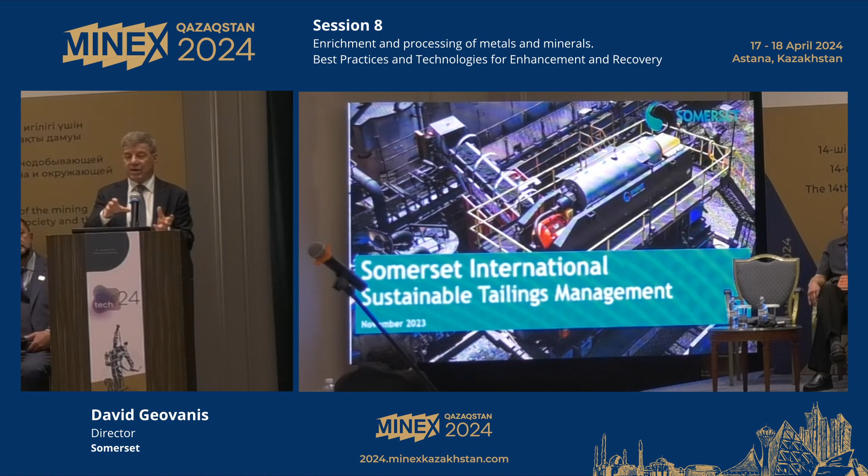So I'd like to introduce you to our company, Somerset International. It was founded in 2008, headquartered in the US, and we specialize in recovering ultrafine particles from tailing flows. And this technology is unique and patented. We've got an R&D center in Brisbane, and we are continuously innovating our technology. And not only do we have an innovative technology, we have a very innovative business model.

The way we work is we design, build, install, and operate our system in existing clients' processing plants. So basically, the client doesn't have to pay any money for the installation or the operation or the maintenance of the facility. So we like to call it asset light. And the way we get compensated is we get a share of the value of the additional tons that our system captures. So if our system operates well and we can capture an additional 10 or 15 tons per hour of product,

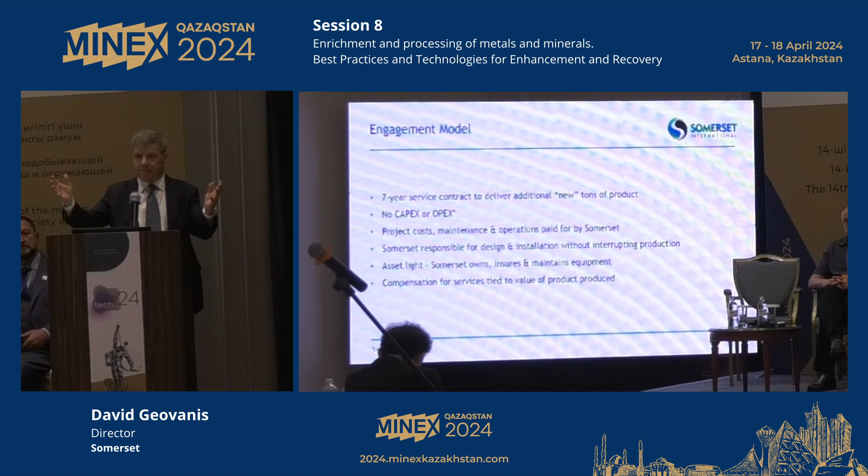And the way we engage with customers, this unique business model, is we're not selling equipment, we're a service provider, and we enter into, let's say, a 7-year contract with a client, whereby, again, we design, build, install, and operate the system, so there's no capital expenditure and no operating expenditures by the client. And we also don't interrupt the existing plant. So the plant's working, and we build our system or install it inside the plant, and we connect to the flow of the waste without interrupting the factory works.

So why we think this is attractive for clients is we increase revenues. You know, we typically produce 10 to 20 tons an hour of additional product, or let's call it 100 to 150,000 tons of additional product a year, which we deliver back onto the main product conveyor of our client, and they sell it, and then we get a share of those revenues. And there's no capital or operating risk for the client. Again, if the thing doesn't work, we don't get paid.

And it's a turnkey solution. We do all of the design, all of the government permitting, which in Kazakhstan, I'm sure, is a similar system to Russia, and permitting is not easy, but we've got a team of 30 people in Russia that have designed and built and operate our systems, and we think we can easily transfer that knowledge to here.

And we also recover water back into the plant, which is very important. I've read that Kazakhstan has some issues with water, not as bad as other markets we're looking at, like Morocco and Jordan, which, in the deals we're looking at there, they don't even care about the additional product. They just want us to preserve their water.

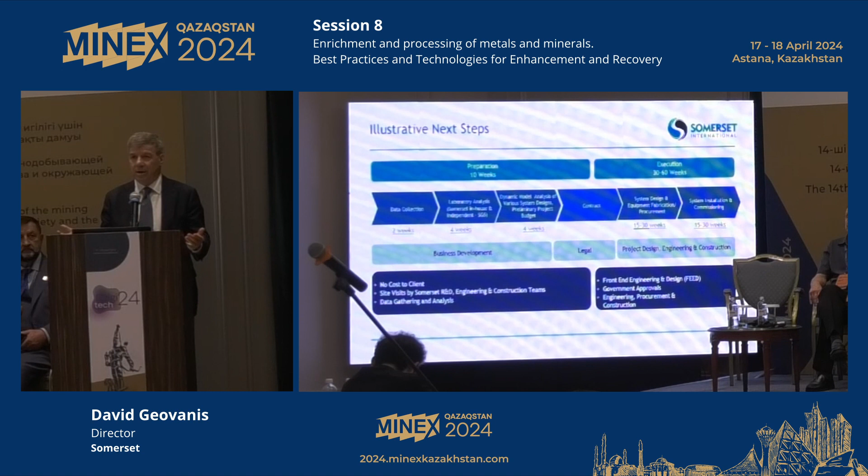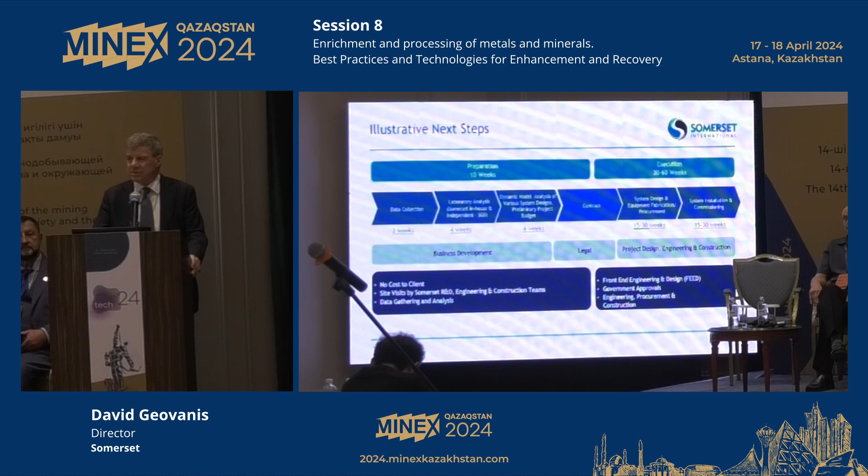And the agreement we make with our clients is, we say we've got to produce a minimum of X tons an hour at this moisture and this ash level, and if we don't, you can kick us out, and we're screwed. So we want to make sure this thing's going to work before we invest in this. And to date, we've invested about $100 million of our own capital.

And here are a few examples of projects. One project we're looking at is recovering phosphates. To date, we're focused primarily on coal, but we want to move into other minerals. And I know there's a big phosphate company here in Kazakhstan, and we're actually looking at phosphates in Russia. Interestingly, phosphates aren't sanctioned because the world needs phosphates, because the world needs food, so there's a potential phosphate company there. But this one we're looking at, we have the potential of capturing an additional 1 million tons a year. This would be a massive project with 40 centrifuges.

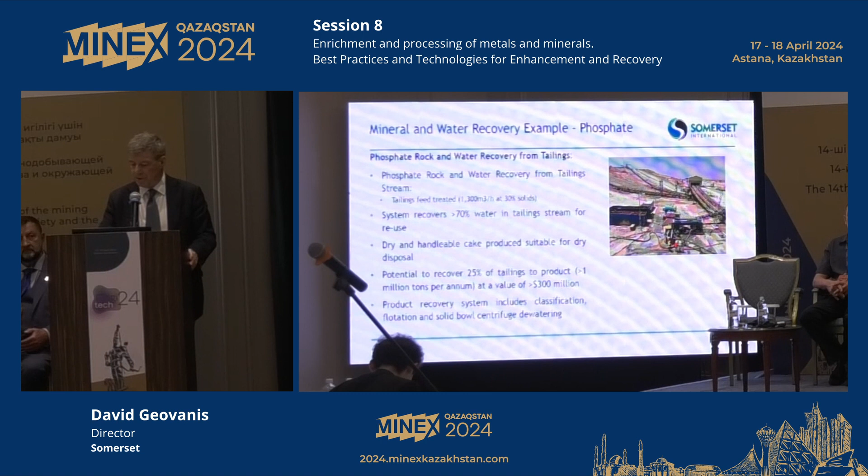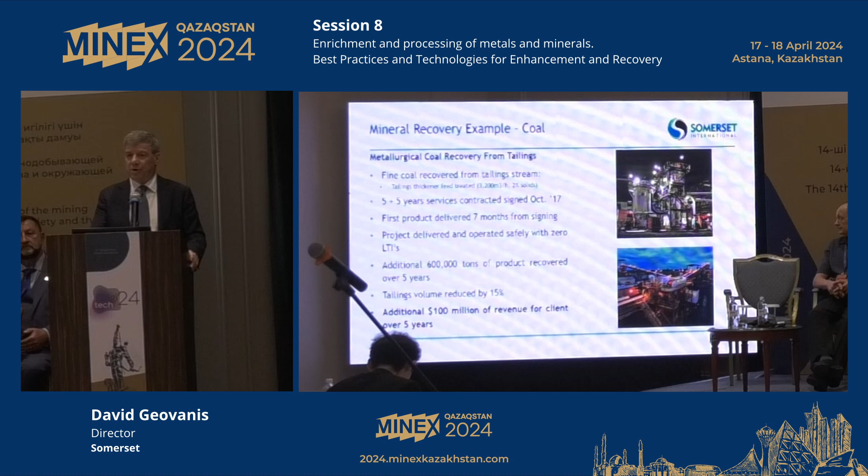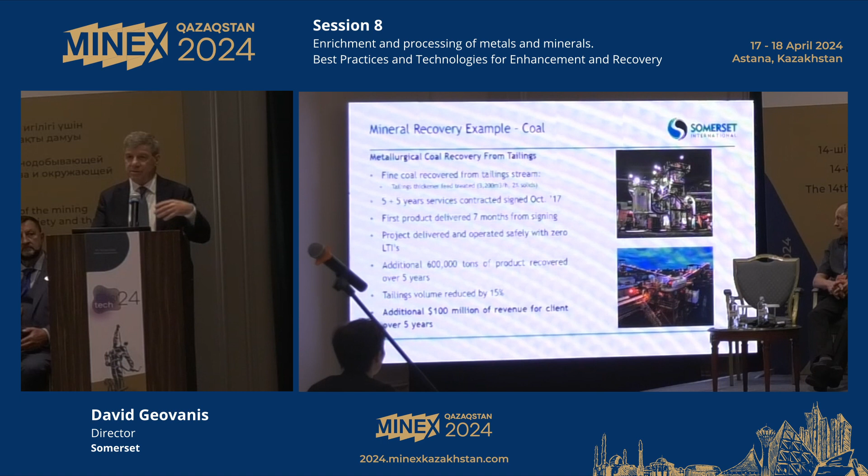This is the Australian one I showed you previously. Over the past 5 years, we've captured an additional $100 million of revenue for the client. And this is a deal where it was a 5-year deal that expired in 2022, and they said, hey, let's keep it going for another 5 years. Because for them, it's free money. They don't have to pay anything. And there's a lot of maintenance costs involved. We've got employee costs, replacement parts, and the client doesn't have to pay anything. So they're happy for us to stay around for another 5 years.

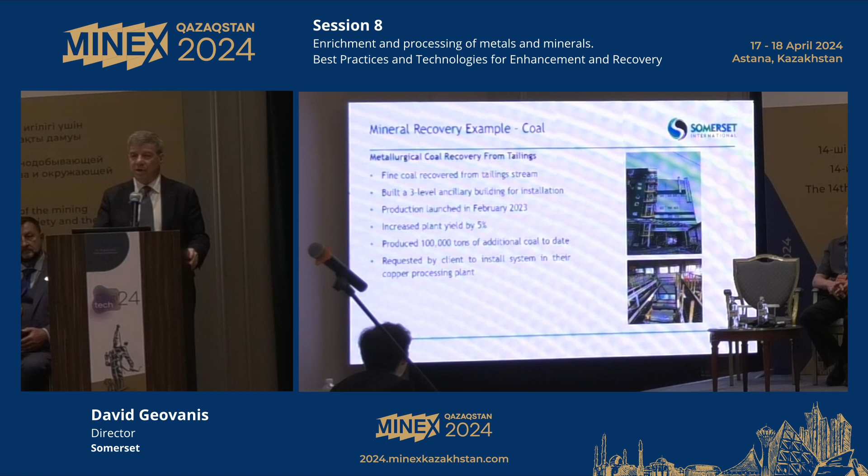This is one we built in Russia. The green building is the existing plant, but they didn't have room. So we built the white building next door to it, which is a 3-level building. Over the past year, we've produced 100,000 tons of additional product for them.

So time is running out. We'll end on ESG. Again, we capture about 95% of the valuable minerals in the stream. So that's, again, reducing those minerals that are dumped. And instead of dumping wet tailings into a pond, you can do dry disposal since we've dewatered the resulting cake. And it improves water usage. So we think all in all it's a great proposition for clients. Increase revenues, no capital costs, no operating costs, and get some points for your ESG report card.

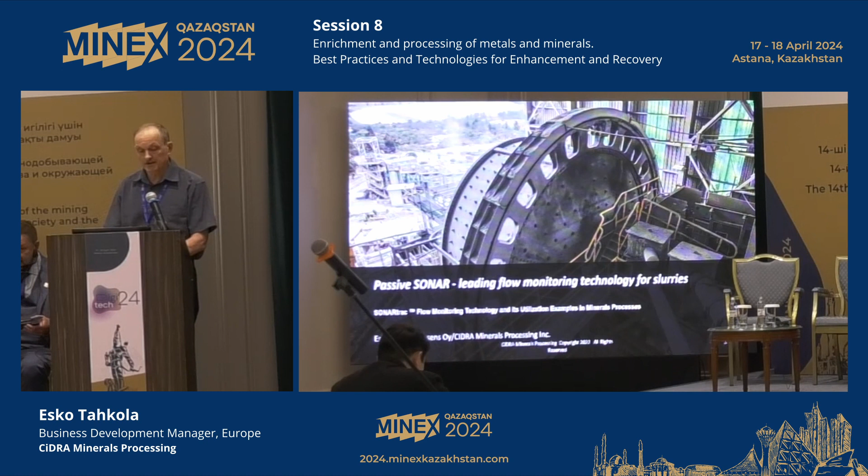My topic here is the passive sonar flow monitoring technology that has become an industry standard for slurries. CiDRA is an American company providing solutions to optimize the performances on concentrators. Passive clamp-on SONARtrac measurement is the only new flow measurement technology developed during the last 40 years. It's been on the market 20 years. It installs around the pipe. Even for big pipes, it's very lightweight, easy to install, not affected by the slurry properties.

It has a multiple measurement capability, measures the volumetric flow, also the volume occupied by bubbles, and based on those, we can correct the errors the bubbles are causing for density measurements, so you get better mass balances. And there are diagnostic measurements on the flow itself and the process running stability.

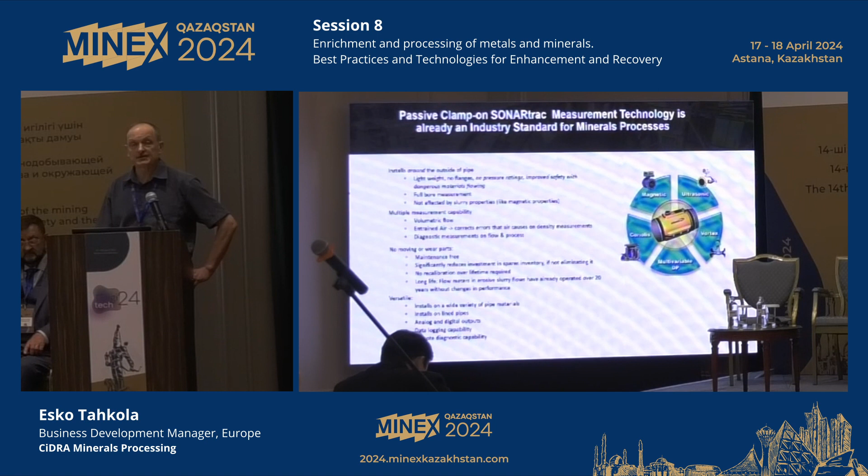There are no moving or wear parts, it's totally maintenance-free. It has a long lifetime. We have customers that have had it on pipes for 20 years without any maintenance. So you can avoid all kind of process shutdowns because of critical measurement failures. It's versatile, it installs on a wide variety of pipe materials, and it also is an effective data logger, so it enables remote diagnostic capabilities.

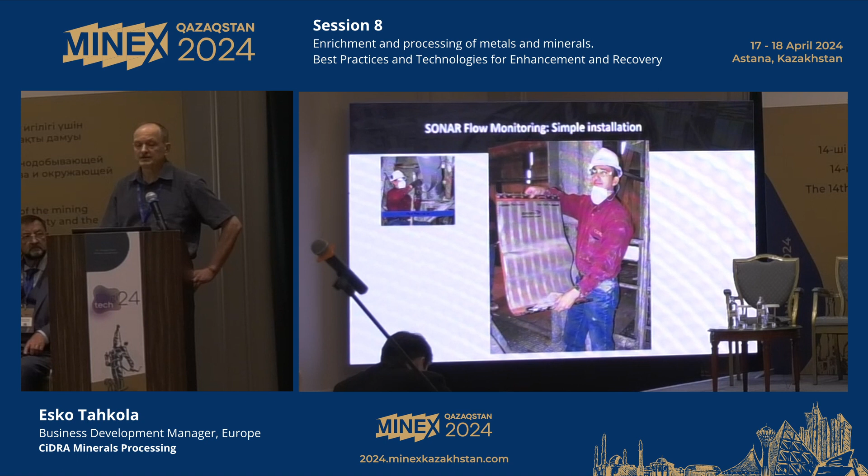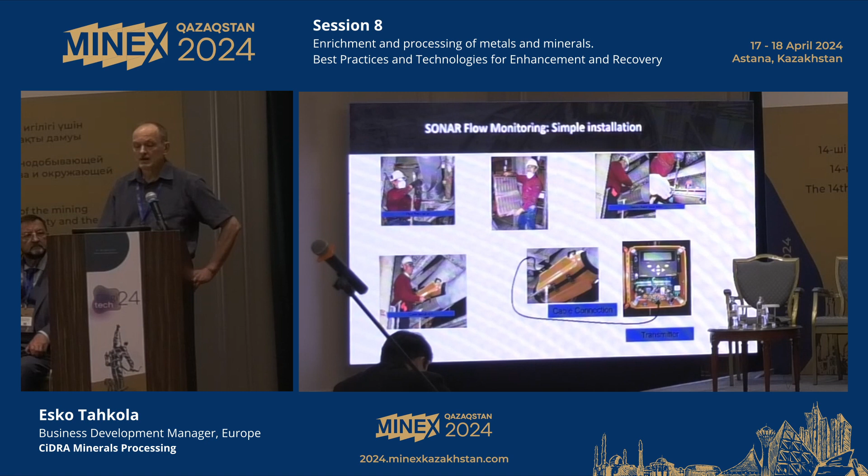Installation is simple, you just clean the pipe, take the sensor mat, tighten it around the pipe, put a protective cover onto that, and connect it to the transmitter that is then further connected to your DCS system. And like I said, it's an efficient data logger. You can pick up 1 month data histories with 2-second intervals with a USB stick and send it to us for analysis. We can do the actual optimizations according to the actual flow model in the pipe totally remotely.

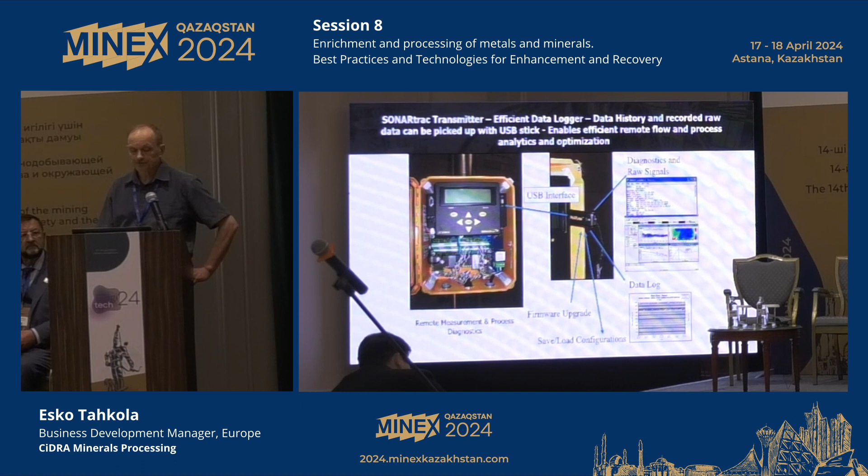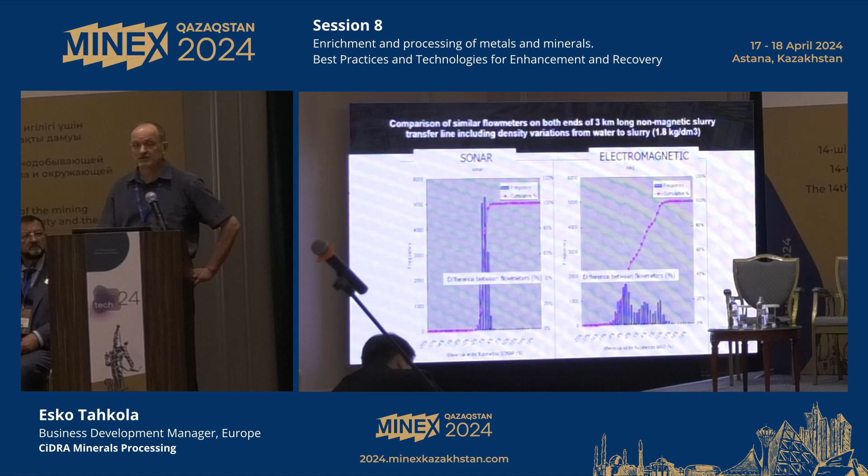Additional process measurement information is provided by the gas volume fraction measurement, so the volume of the bubbles, and based on that we correct the errors for density measurements. Then we have a flow quality signal, real-time information on the stability of the flow at the measurement position. So it's revealing all disturbances in the process caused by segregation or air content or pumping problems. And the sound pressure level is measured also, and the sound is coming from the pump, so it enables pump analysis and reveals pump service needs.

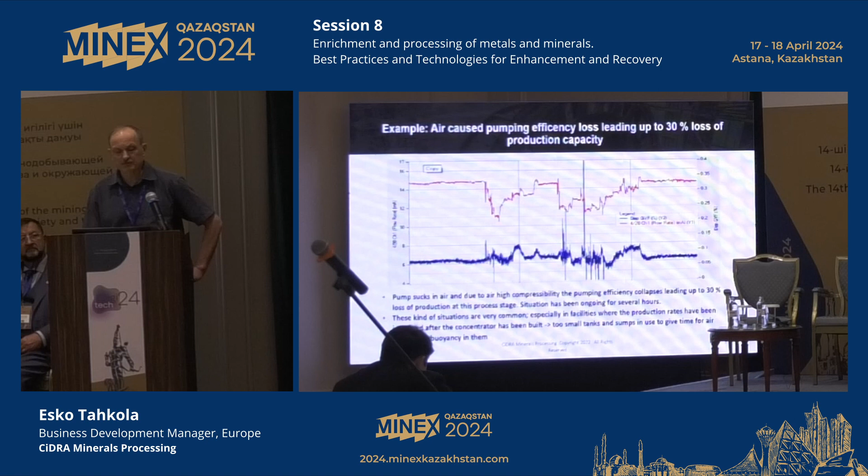Then the density measurement correction. If we take a theoretical slurry without bubbles, though there always are bubbles in slurries, and the specific gravity, so the density, of that is 1.4, the density measurement is showing that. And then we add 10% of bubbles in the volume, then the density measurement is showing only 1.26. So there is already 28% error in your mass balance.

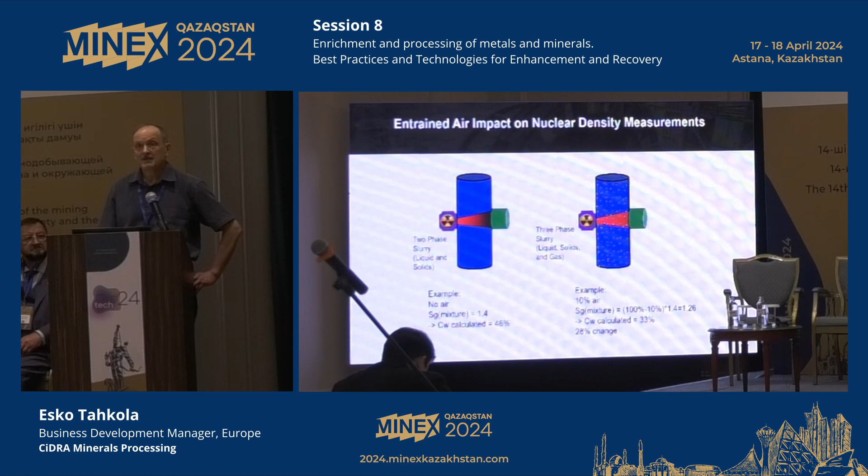As density measurement is measuring the difference between water and slurry, the closer to water the slurry density is, the bigger the error caused by already 1% of air in the slurry. So if this density is 1.2, 1% is already causing 5% error in your mass balances.

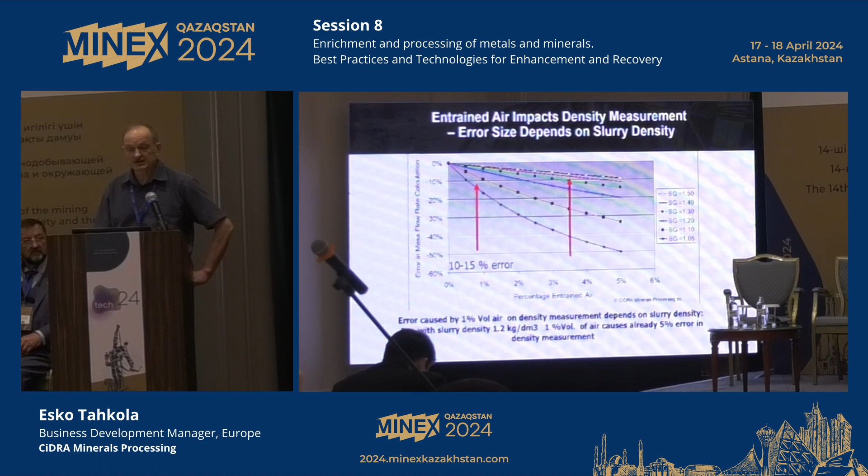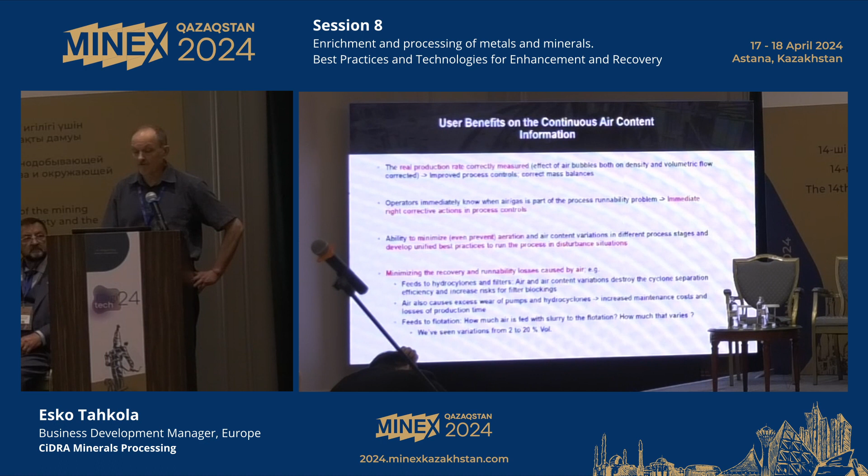Of course, with this you can get the real production rate correctly measured, and you can also always see when air is causing problems for the process runnability. And the operators can immediately do the right corrective actions. When you measure it, you are able to control it, so minimize the aeration, avoid it and even prevent it. And then you are minimizing the recovery and runnability losses caused by air, because air is actually quite a big factor causing variability in process runnability at concentrators.

Diagnostic information on the flow. We are measuring the propagation velocities of all sizes of turbulences that carry the solids forward in the line. This gives information on the real flow model at the installation position. So we can optimize this measurement to work much better than any other flow measurement that is calibrated to measure fully developed turbulent flow of water. And that model is never actually present with slurries, because there is always the gravity effect affecting the solids distribution in the pipe.

The flow model is monitored by the flow quality factor, a real-time signal giving users information on flow disturbances in the line. And you can even set alarm levels on that signal so that the operators know there is something wrong in the process runnability.

Here we see a picture where the convective ridge of turbulence is separated for the carrier liquid flow, and then there are solids flowing with a lower flow velocity. This kind of segregation leads to density pulsation that causes filter blockages, improper cyclone operation, and also line blockages. Typically in concentrators in the Western world, it's said that 1 to 2% of the process production time is lost because of line blockages.

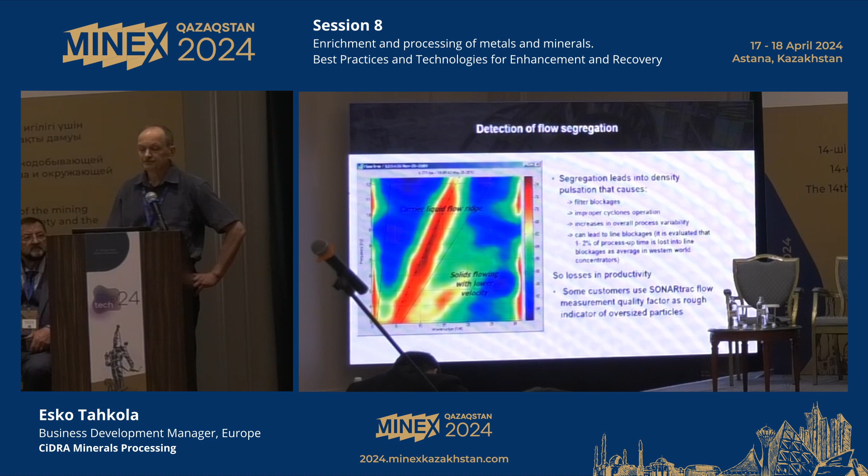Here we see a cyclone battery feed line, and the flow quality is dropping, showing that segregation is starting and a dense plug is forming in the vertical feed pipe. After a while, that plug is so dense that even the flow velocity drops. Then the pump pushes that plug into the hydrocyclone, but we can see from the flow quality that new plug formation has started. So there is continuous density and flow pulsation in that feed line, which is ruining the operation of the hydrocyclones.

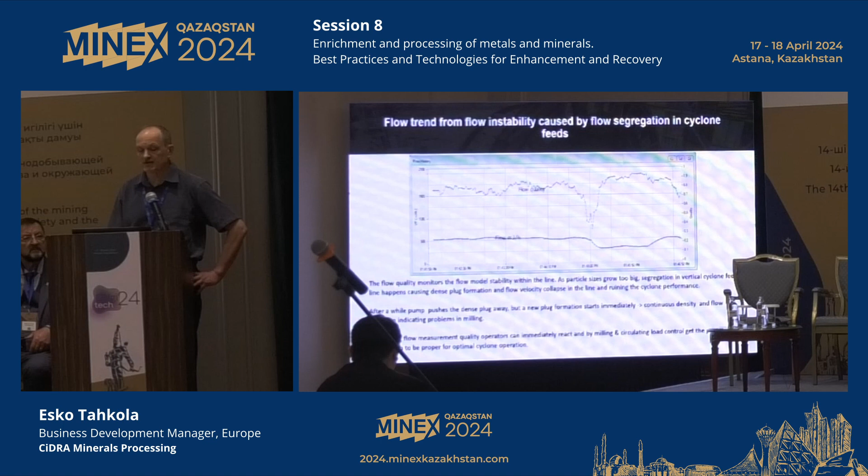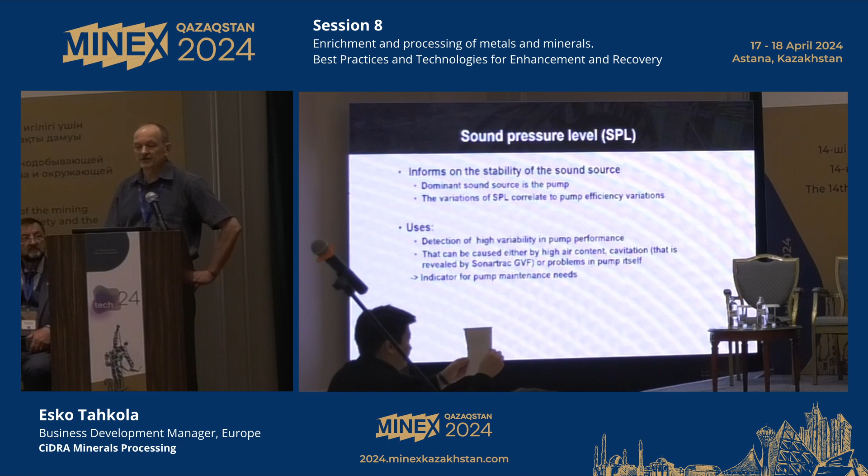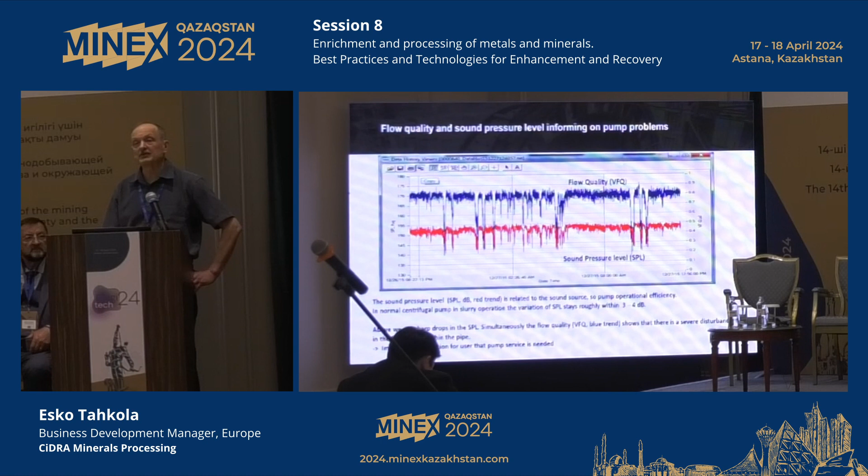Diagnostic information on pump operation is given by the SONARtrac sound pressure level measurement, and it informs on the stability of the pump operation. Here we can see how the flow quality has had sudden drops, and simultaneously the sound pressure level has collapsed. It directly tells us that you have a problem with the pump, so you need to do pump service there.

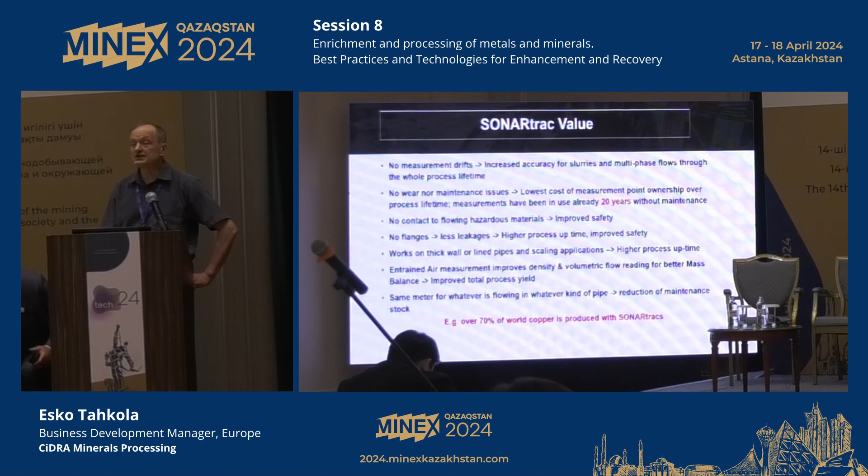So the value of SONARtrac is that there are no measurement drifts, and the meters last throughout the process lifetime. There's no wear, no maintenance. Like I said, already 20 years without maintenance or stoppages. No contact with the flow in hazardous materials, so that's a safety issue, and there are no flanges when you install it. It works with thick-walled or lined pipes and scaling applications, so you will have higher process uptimes. And the entrained air measurement we already discussed, and it's the same meter for whatever is flowing in whatever kind of pipe. Already over 70% of the world's copper is produced utilizing SONARtrac, as an example.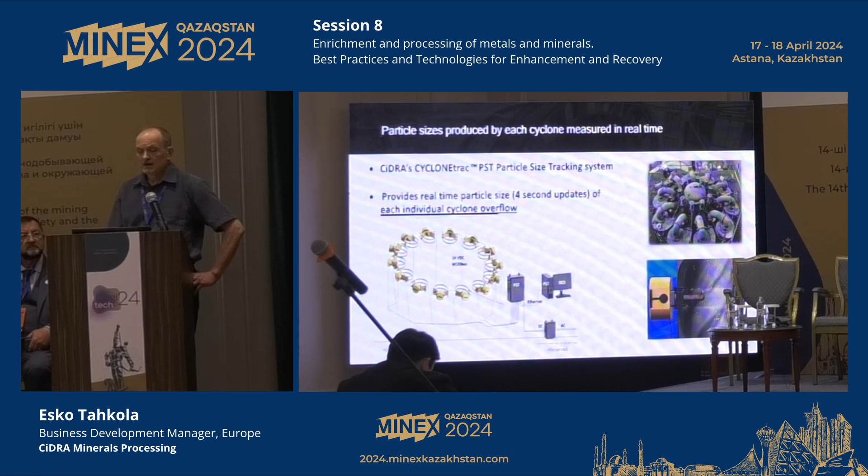Combined with the CiDRA-provided CYCLONEtrac PST, which is a real-time particle size measurement from every cyclone overflow pipe in a battery, these two put together to optimize the grinding circuit have proven to bring optimized net metal production at our customers. Some have reached even up to 10% increases in concentrate net metal production.